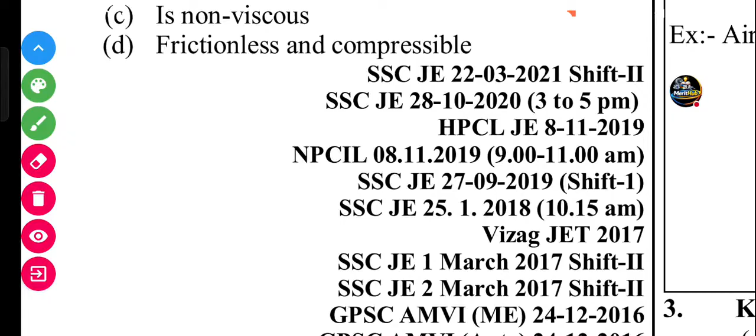First question from fluid mechanics, we start from fluid mechanics. Okay, the question is: an ideal fluid... A, obeys Newton's law of viscosity. B, is both incompressible and non-viscous. C, non-viscous, frictionless and compressible. Okay, an ideal fluid is both incompressible and non-viscous. Option B is right.

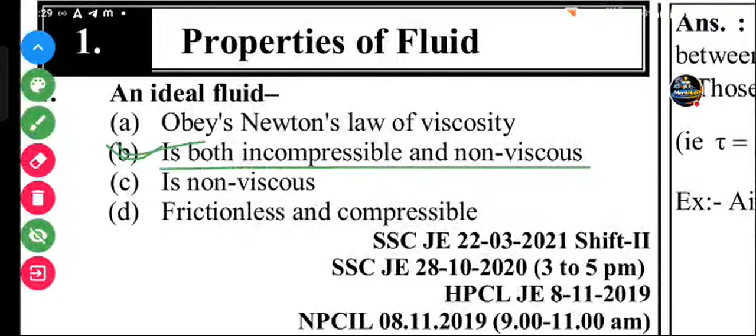Let's check the answer again. Characteristics of the ideal fluid: an ideal fluid has zero viscosity, is an incompressible fluid, its bulk modulus is infinity, it has no surface tension, it offers no resistance to flow. In reality, ideal fluid does not exist in nature. Okay, these are very important; different types of questions are mixed from here.

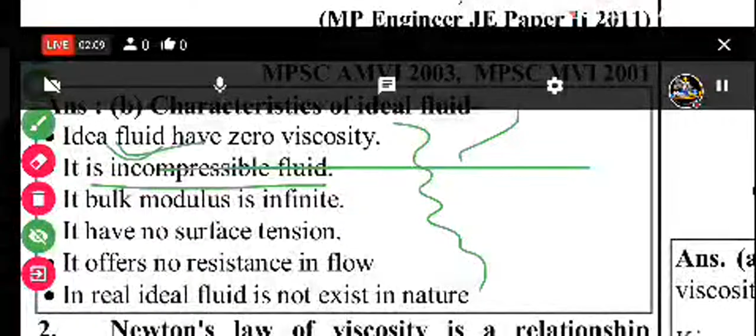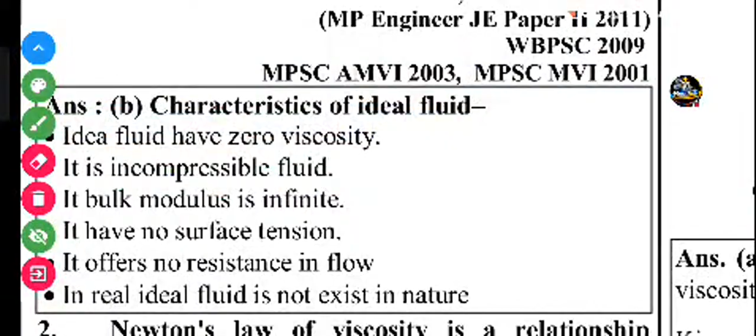Sorry for the network issue. Okay, second question.

Friends, the second question is: Newton's law of viscosity is a relationship between rate of shear strain and temperature, pressure and velocity, shear stress and velocity, shear stress and rate of shear strain. What is Newton's law of viscosity?

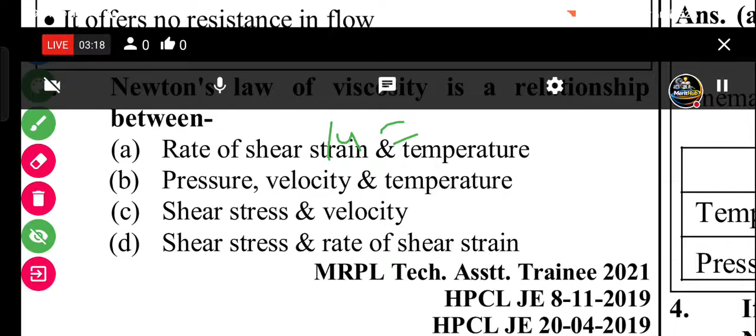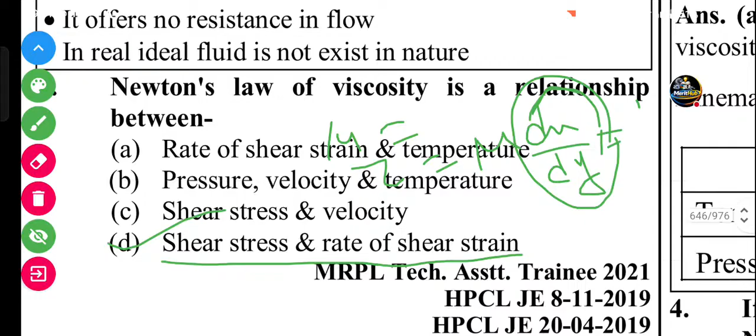Tau equals mu du by dy. So this is the rate of shear strain or velocity gradient, and rate of shear strain du by dy equals d theta by dt. So D is the answer, shear stress and rate of shear strain. Let's check whether it's right.

Let's see the explanation: Newton's law of viscosity is a relationship between shear stress and rate of shear strain. Fluids which follow Newton's law of viscosity, tau equals mu du by dy, are known as Newtonian fluids, like air, water, alcohol, kerosene, diesel, petrol. Real fluids are Newtonian fluids also.

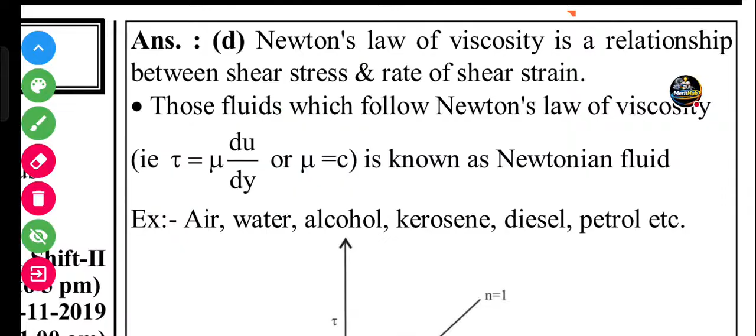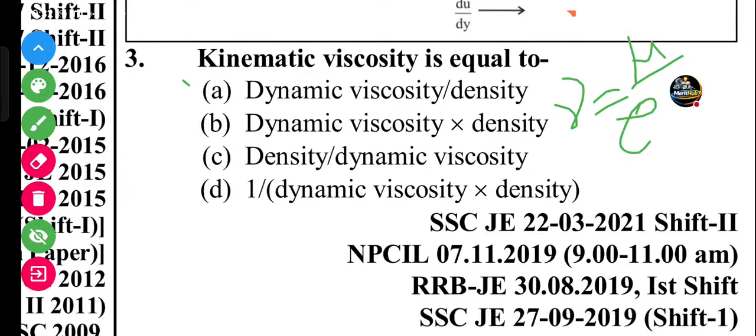Next question: kinematic viscosity is equal to... We know kinematic viscosity equals dynamic viscosity by density. Option A is the right answer. Explanation: kinematic viscosity is the ratio of dynamic viscosity and density of liquid, mu by rho, in meter square per second.

If temperature increases, kinematic viscosity of liquids decreases and for gases it increases. With pressure, for liquids it does not change, but for gases kinematic viscosity decreases.

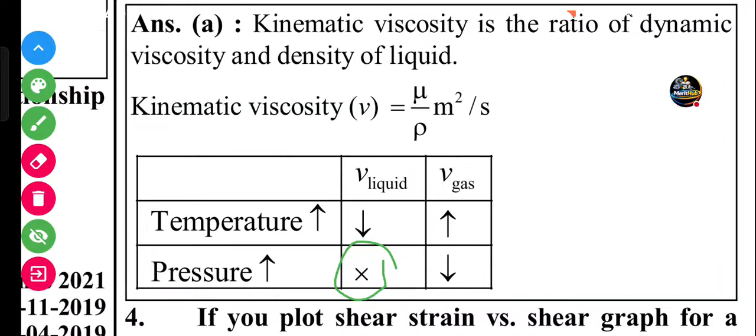Next question. If you plot shear stress versus shear strain graph for a Newtonian fluid, the shape of the curve will be: give the answer in the comment. A is straight line, B is elliptic, C is hyperbolic, D is parabolic. A is the straight line. Okay, then check the answer.

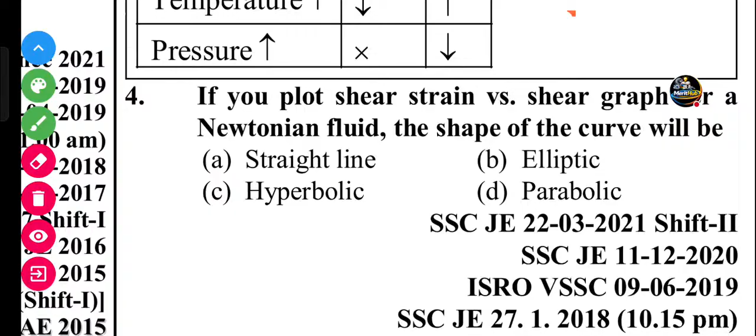This is a straight line curve for Newtonian fluid, slope mu equals tan theta. Fluid which obeys Newton's law of viscosity, tau equals mu du by dy, is called Newtonian fluid. The curve of Newtonian fluid is a straight line in the stress-strain graph. Example: water, air, kerosene, glycerin, petrol are all Newtonian fluids.

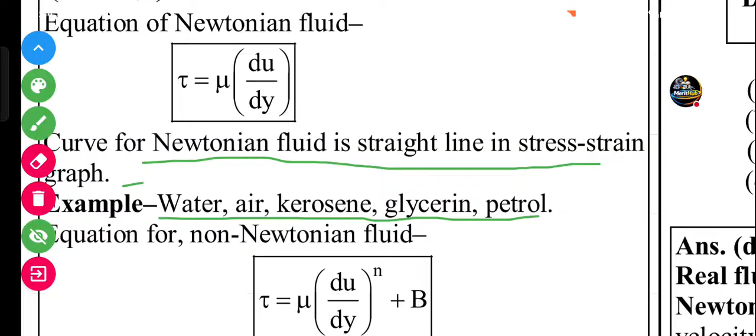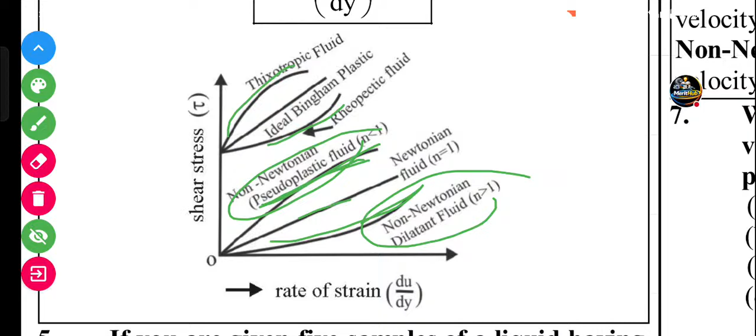Next question, question number 5. If you are given 5 samples of liquid having fixed density, identify the increasing order of heights the samples will reach in the following capillary tubes. Which is the answer? If diameter decreases, capillary rise increases.

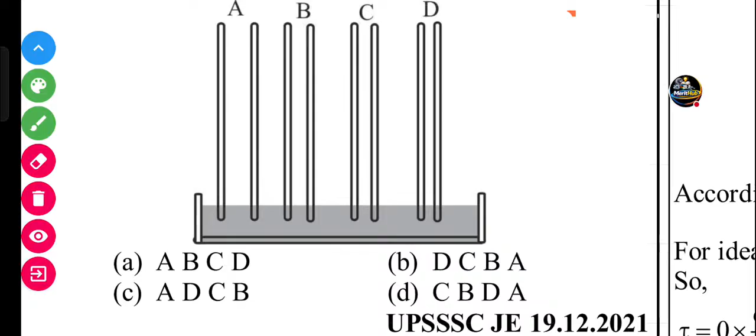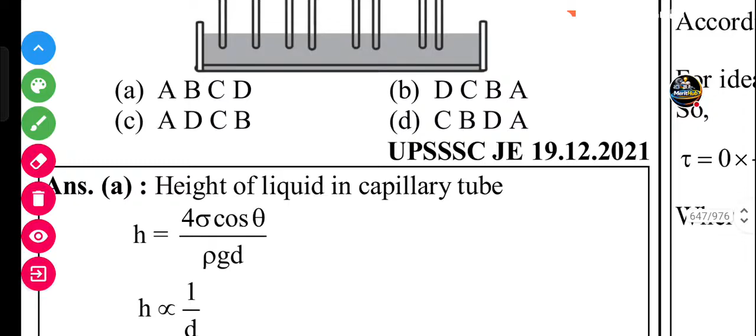Okay, let's check it. Option given is A. Why? Because height increases when the diameter decreases, so height is greatest for D. Sorry, it asked increasing order. So in increasing order: A, B, C, D.

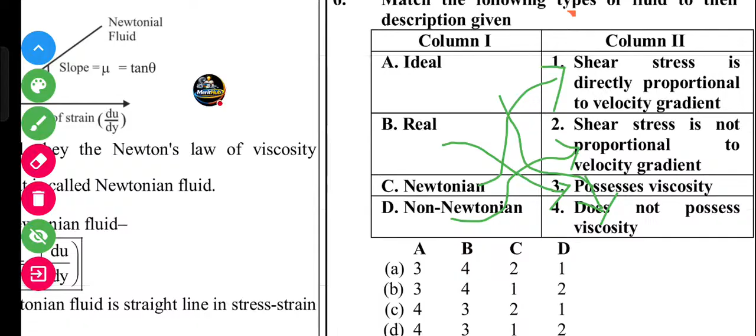So C is 1, B is 3, D is 2, and A is 4. D is the answer. Check it. Yes, you can see that D is the answer. The explanation: the ideal fluid does not possess viscosity, the real fluid possesses viscosity, in the Newtonian fluid the shear stress is directly proportional to the velocity gradient, and in the non-Newtonian fluid the shear stress is not proportional to the velocity gradient.

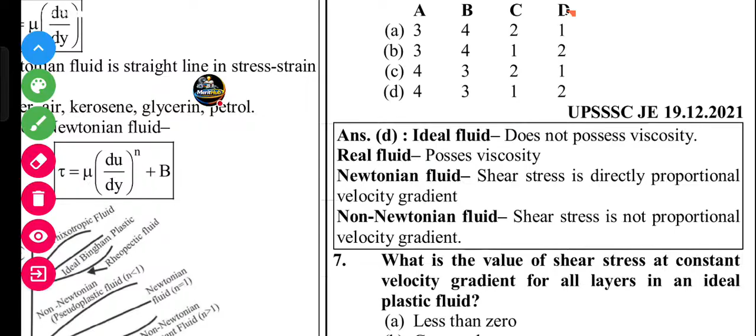What is the value of the shear stress at constant velocity gradient for all layers in the ideal plastic fluid? A, less than 0, B, greater than 0, C, equal to 0, D, cannot be determined. Okay, for the ideal plastic fluid it is greater than 0.

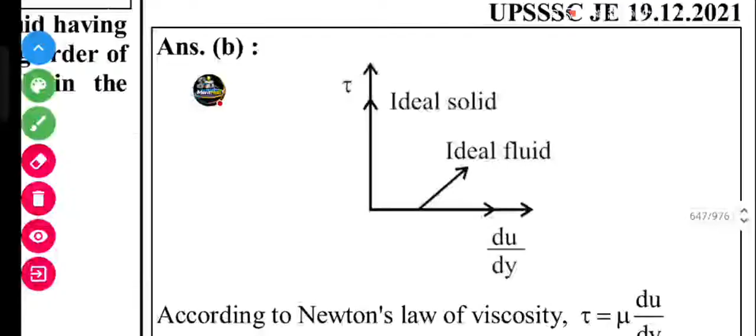Next question. A certain liquid rises 10 centimeters in a capillary tube that has a radius equal to 4 mm. To what height will the same liquid rise in another tube of the same material but with half the original radius?

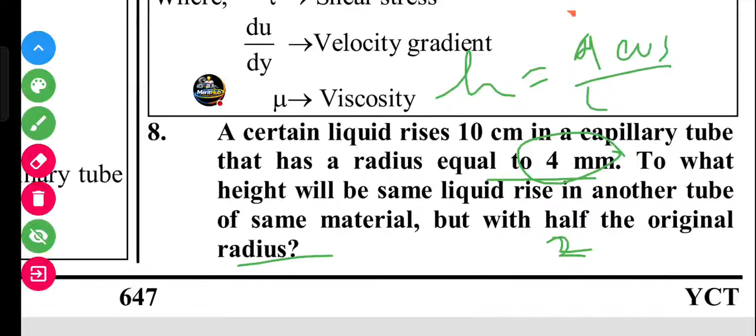For radius 2. You know that h is equal to 4 sigma cos theta by rho g d. So in the relation between them, 4 sigma, rho g and cos theta cancel out from this equation. So h1 by h2 is equal to d2 by d1, so 4 by 8 is 1 by 2. If you solve that, the answer is coming to 20 centimeters. H2 is 20 centimeters.

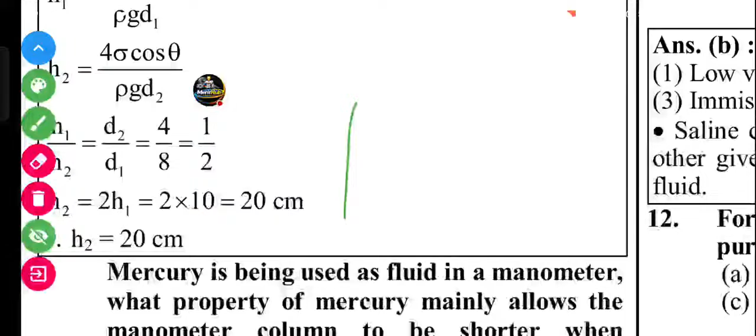Next question. Mercury is being used as the fluid in a manometer. What property of mercury mainly allows the manometer column to be shorter when compared to other fluids? Its high density, its low vapor pressure, its low miscibility, or its high inertness. It is the high density. That is the answer.

Mercury is used as the fluid in a manometer due to its high density, low vapor pressure, low miscibility, but due to its high density, a shorter manometer column is required compared to other fluids. 1 atmosphere is equal to 760 mm of Hg column and 10.33 m of water column. Density is the main property for a manometric fluid.

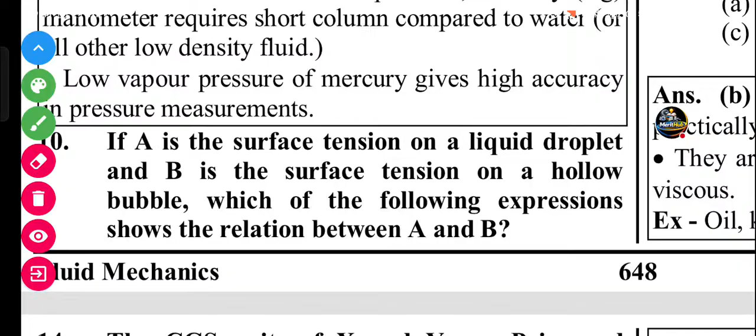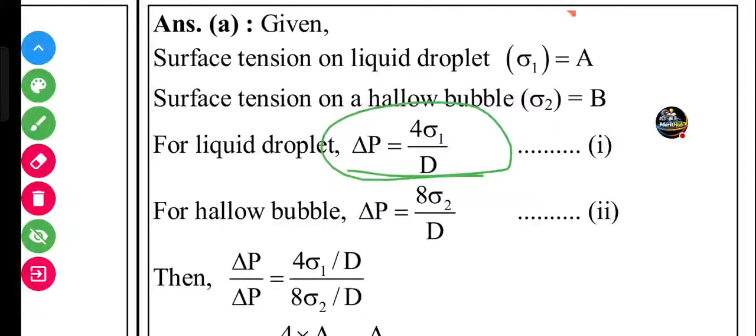Next question: if A is the surface tension on a liquid droplet and B is the surface tension on a hollow bubble, which of the following expressions shows the relation between them? This is the answer. We know the pressure drop of the droplet is 4 sigma by d, and for the hollow soap bubble, 8 sigma by d. So if you compare these two equations, we get A equal to 2B.

Friends, question number 11. From the given set of statements regarding the manometric fluid, identify the incorrect statement. Kerosene can be used as a manometric fluid. Saline can be used as a manometric fluid. Alcohol can be used as a manometric fluid. Water can be used as a manometric fluid. C, alcohol... Sorry, B. B is the answer, I was wrong. Saline can be used as a manometric fluid. What is the reason? The properties of a manometric fluid: low vapor pressure, high density, immiscibility, non-toxic, easily available, etc.

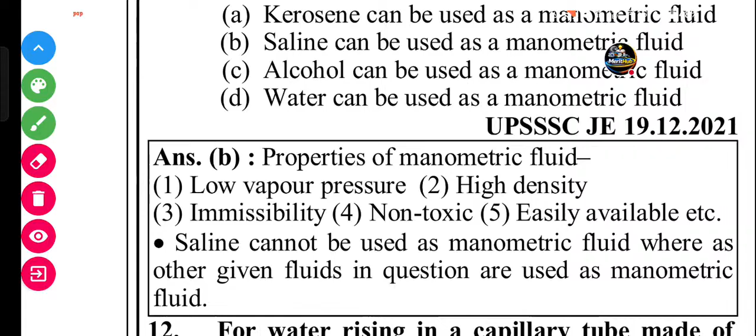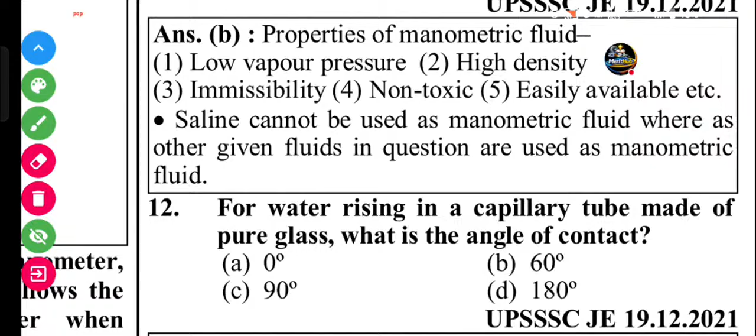Incorrect statement. Kerosene, alcohol and water can also be used as manometric fluids. Water rising in a capillary tube made of pure glass: what is the angle of contact? For pure glass with pure water, the angle is 0 degrees. And for mercury and pure glass, theta equals 130 degrees, angle of contact 130.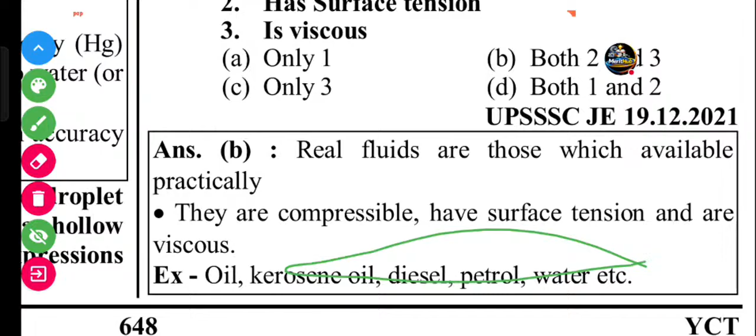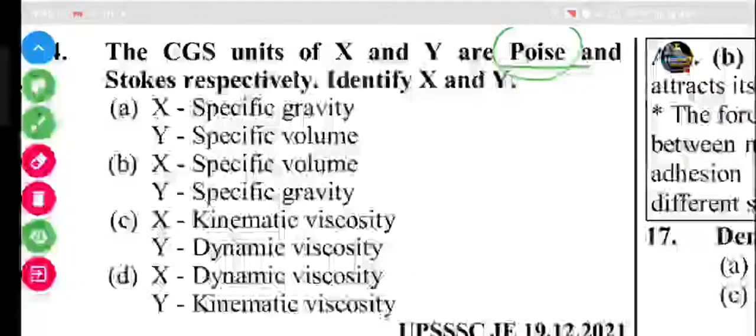Question number 14: the CGS units of X and Y are the poise and stokes; identify X and Y. Poise is the unit of dynamic viscosity, and stoke is the unit of kinematic viscosity. So X is the dynamic viscosity, and Y is the kinematic viscosity.

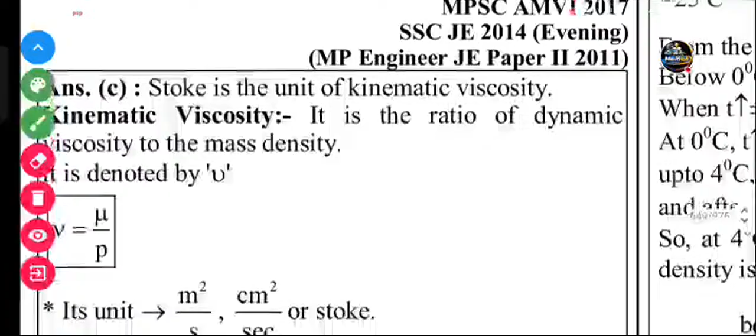Stoke is the unit of kinematic viscosity, as the explanation given here shows. Kinematic viscosity is the ratio of dynamic viscosity to mass density. It is denoted by nu, so nu equals mu by rho.

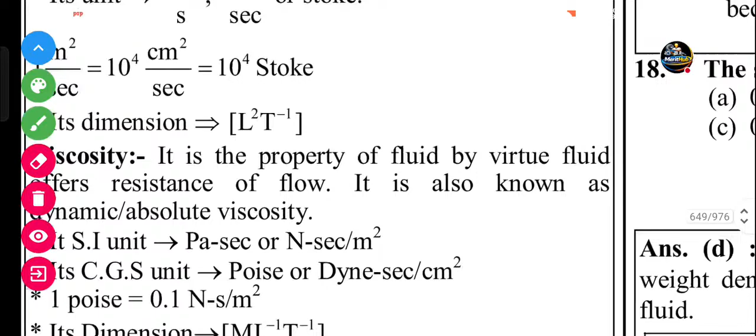Question number 16: the property of a fluid by virtue of which it attracts its own molecules is called cohesion. Attraction between different molecules is called adhesion.

Please comment on whether cohesion dominates in air, gases, or liquid. In liquid, which dominates, cohesion or adhesion?

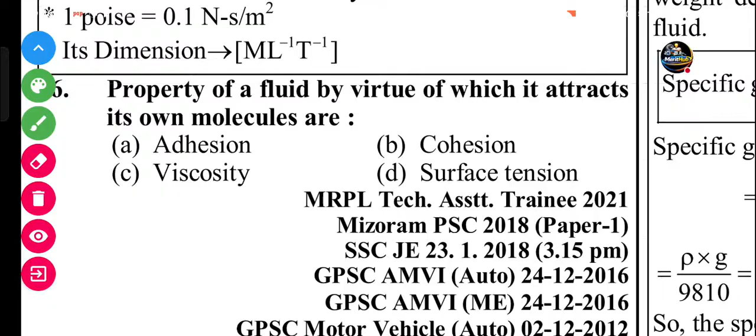Question number 17: the density of water is maximum at 4 degrees centigrade, and at that point the volume is minimum.

Question number 18: the specific gravity of water is 1. What is specific gravity? It is the density of the fluid divided by the density of the standard fluid. The density of the fluid is water, which is 1000, and the density of the standard fluid is also water, 1000. So the specific gravity is 1.

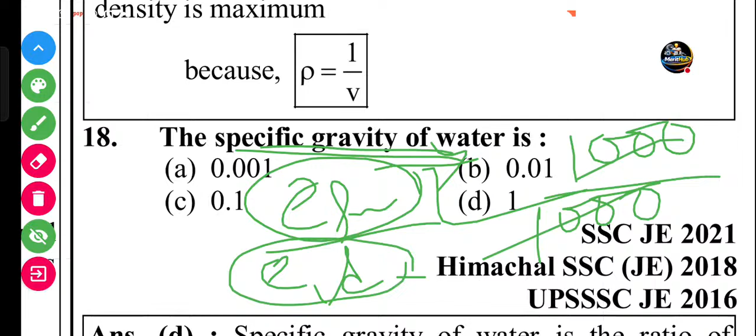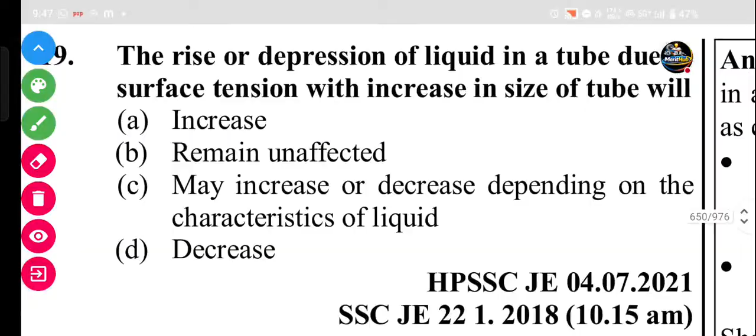Next question: the rise or depression of liquid in a tube due to surface tension decreases with an increase in the size of the tube. The rise or fall of height is inversely proportional to diameter, because the capillary rise equals 4 sigma cos theta by rho g d.

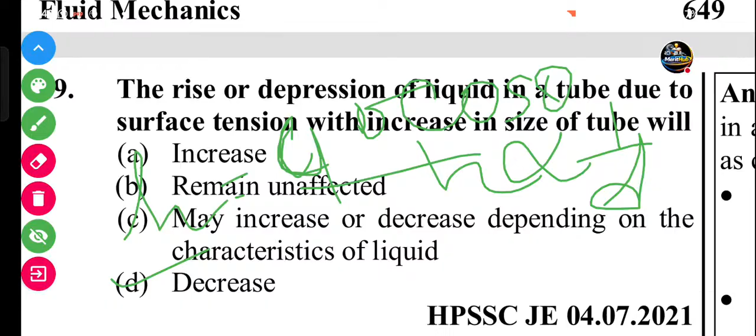Here is the explanation given. Capillarity is a phenomenon by which a liquid, depending upon its specific gravity, rises into a thin glass tube above or below its general level. This phenomenon is due to the combined effect of cohesion and adhesion of the liquid particles.

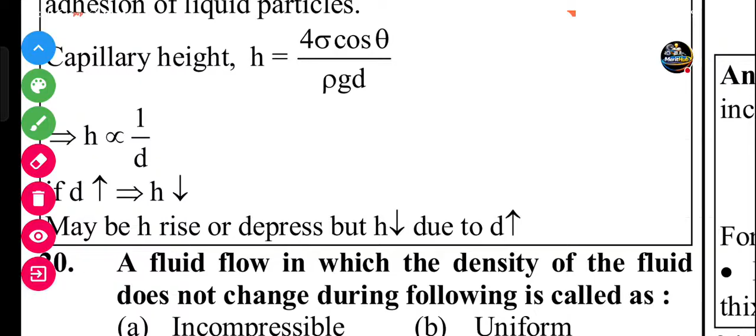Capillary height equals 4 sigma cos theta by rho g d. So H is proportional to 1 by d. If you increase the diameter, the height or capillary rise decreases.

Question number 20: fluid flow in which the density of the fluid does not change during the flow is called incompressible fluid or incompressible liquid. Liquids are mostly incompressible, so the answer is correct.

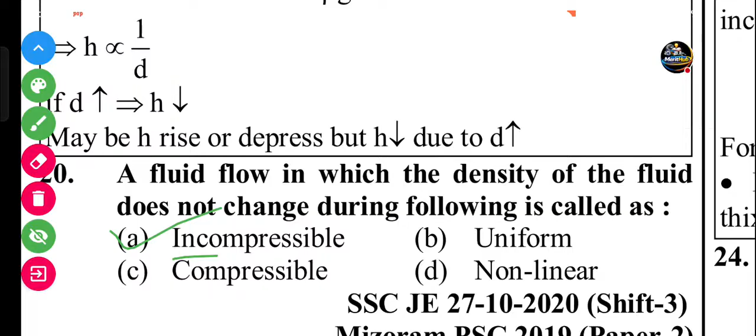Question number 21: fluid rise in thin capillaries, also known as capillary action, is by virtue of which fluid property - mass, kinematic viscosity, surface tension, or temperature? The answer is surface tension.

The explanation is given here: fluid rise or depression in a thin capillary tube, or capillary action phenomenon, is by virtue of the surface tension property of the fluid. Capillary height equals 4 sigma cos theta by rho g d. Capillarity depends on the value of surface tension, but surface tension is not the reason for capillarity.

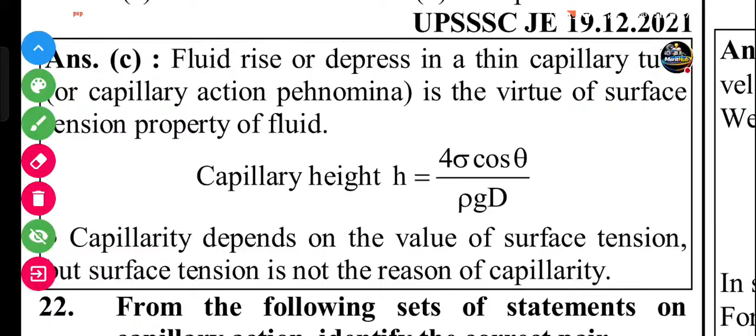Next question: from the following sets of statements on capillary action, identify the correct pair. A: capillary effect is known as the meniscus effect - yes, it is true.

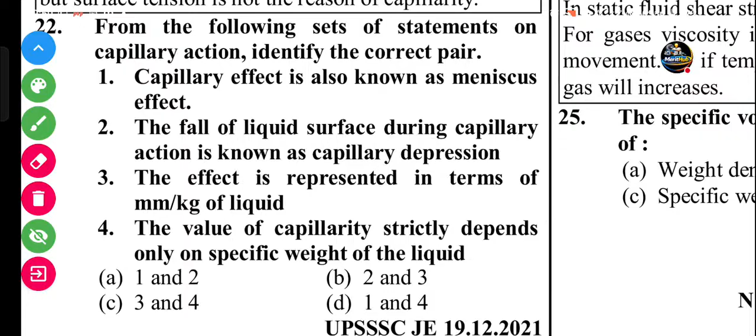The fall of the liquid surface during capillary action is known as capillary depression - yes, true. The effect is represented in terms of mm per kg of liquid - no. The value of capillarity strictly depends on the specific weight of the liquid. So statements 1 and 2 are the answer.

You can check it, and yes, it is the right answer. Here is the explanation: the phenomenon of the rise or fall of liquid in a narrow tube which is dipped in that fluid is known as capillarity.

The fall of liquid surface during capillary action is known as capillary depression. For mercury and glass, the capillary effect is also known as the meniscus effect. The shape of the meniscus for mercury and glass is the convex type.

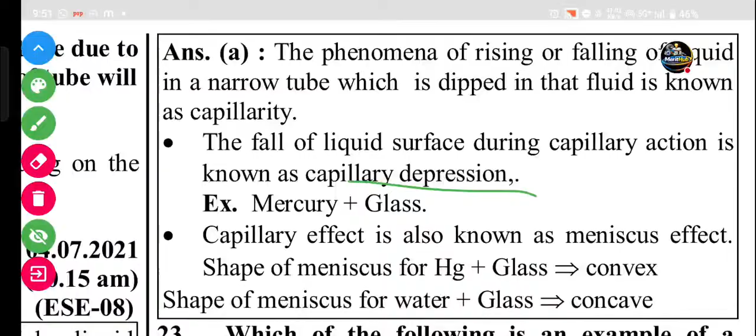This is the convex type, and this is the concave type. For water and glass, the type is concave.

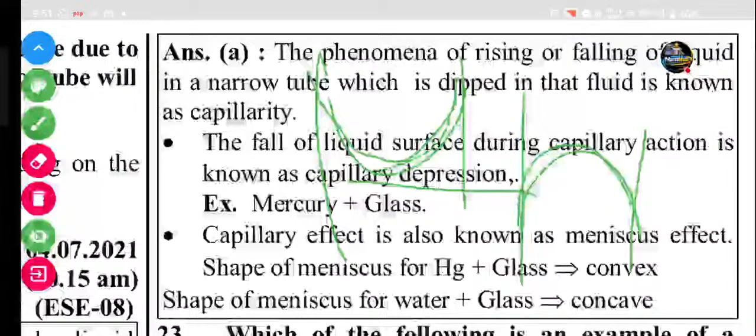Question number 23: which of the following is an example of a thixotropic substance? Examples of thixotropic substances are printer ink and lipstick.

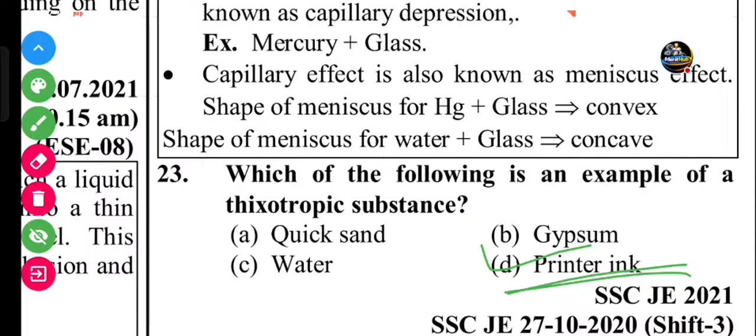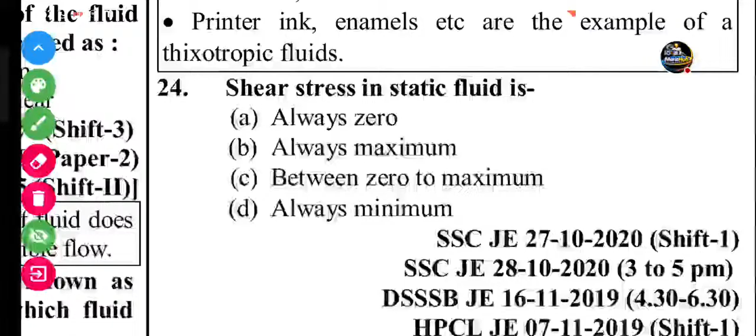The specific volume of a liquid is the reciprocal of the mass density, with unit mass.